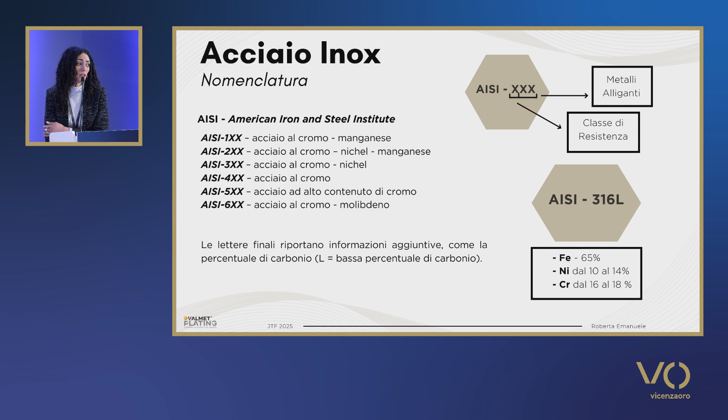AISI 316L is a specific type of stainless steel. It is a chromium nickel alloy containing 65% iron, chromium ranging between 16 and 18%, and nickel from 10 to 14%. This type of steel is also used for medical purposes.

It is not widely coated because the coating is very difficult in the case of this type of steel. The chromium oxide layer makes it resistant to corrosion, so much so that coating is very difficult.

Usually, to coat this type of steel, nickel is used. This is a material that has many additional problems. Once in touch with this material, different percentages of men and women develop allergies. This is why it was banned by the European Union in the case of the nickel release being higher than 0.5 micrograms per centimeter over the week. This is the amount which may provoke an allergic reaction.

There's a law regulating the use of this material: UNI EN 1811/2023. The threshold levels are 0.2 micrograms per square centimeter per week, with the highest level being 0.5 micrograms per square centimeter in the case of objects that are constantly in touch with the skin, i.e. necklaces and rings.

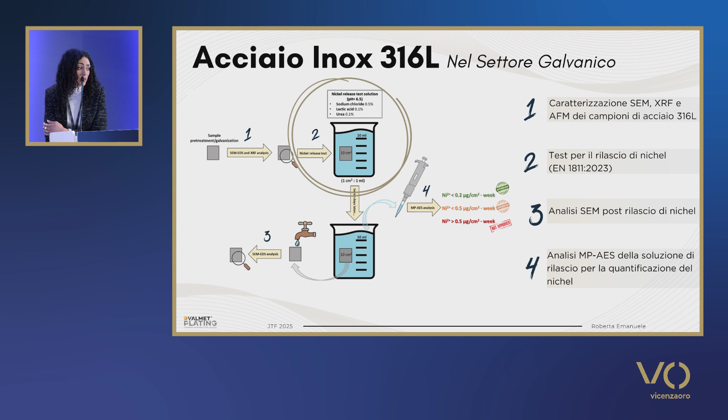So the samples were characterized by means of different techniques. After the week of testing, the samples were rinsed and were analyzed with the SEM microscope to look at the amount of nickel released, and the solutions have been analyzed with an MP-AES test. Let's have a look at the results of this release test.

Based on the legislation, samples are to be cleaned with a solution, and then they should be suspended within a container where a solution of artificial sweat is included with sodium chloride 0.5%, 0.1% urea, and 0.1% lactic acid. The pH should be 6.5 plus or minus 0.1, and the added solution should be proportional to the sample area: 1 square centimeter to 1 milliliter of the solution.

So the samples are left within the solution for a week. At the end of the week, this solution is analyzed with MPAES to understand the quantity of nickel per square centimeter released over the week. We looked at the literature.

This is a SEM test, with images taken after the test. We know that stainless steel 316L does not release nickel unless treated.

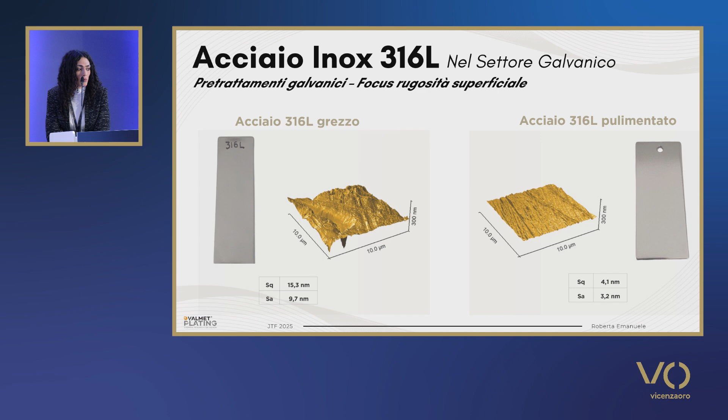If you look at the data for SQ, the two data are very different. The first set of samples was prepared using as a substrate stainless steel 316L.

We then looked at the performance of the wood nickel bath. The first set of samples have been submitted to this bath, depositing gold, a 0.3 micron layer of gold at 24 carats. These are the SEM images of the samples before the release test, and these are the images after the test.

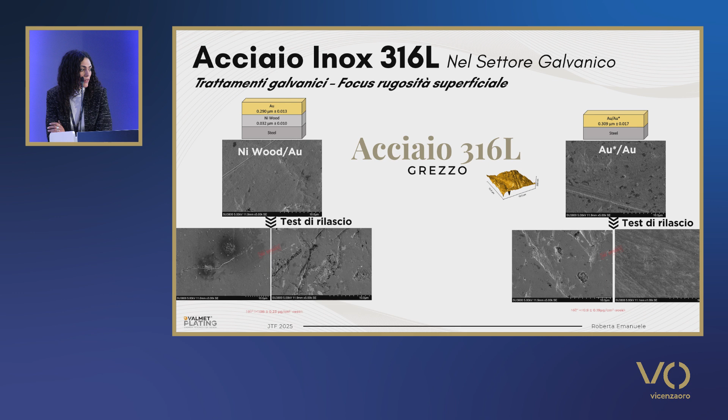As for the results, these are all averages of 3 repetitions, and as you see, the release tests are higher than allowed by the law. For the samples produced with the golden layer, the figure is halved.

You might think that the nickel is released by the substrate of wood nickel, and yet this is counterintuitive because nickel is only included in the substrate. So this means that the superficial activation and the removal of the chromium oxide that was necessary for the coating made it more liable to release nickel.

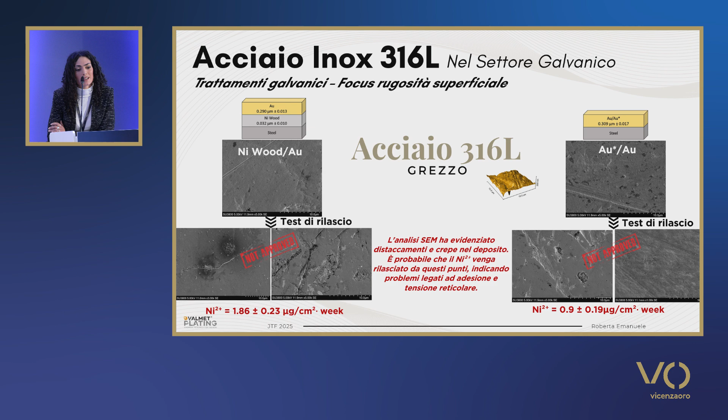In the SEM images, you see that there are many cracks on the surface, so probably nickel is released by these very cracks, where there is a problem with adhesion, and that could be due to an excessive roughness of the sample.

We then used the other type of 316L steel that was polished, and you see that the results are quite clear. In the case of the samples that were subject to coating with wood nickel, we don't comply with the rule, whereas if we use gold, the results are much better.

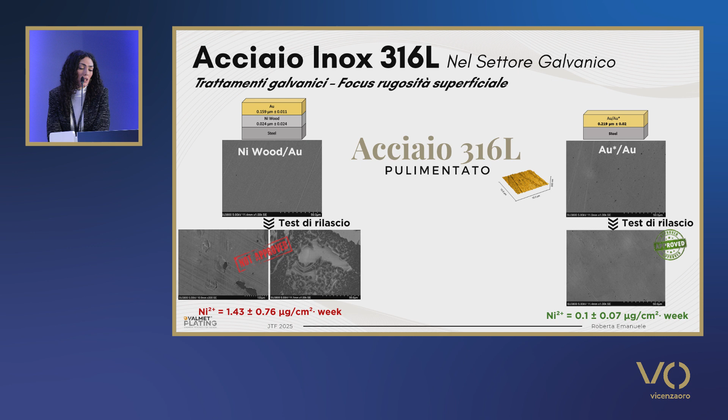We can therefore say that superficial roughness of the sample bears importantly on the final result in terms of nickel release.

We then performed additional studies using the polished stainless steel 316L, and we've resorted to galvanic layering, which is used in the case of costume jewelry, that is copper, bronze, palladium. The samples were then tested.

These are the images after the release test, and unexpectedly the results were bad for both sets of samples. There are very high results in terms of nickel release.

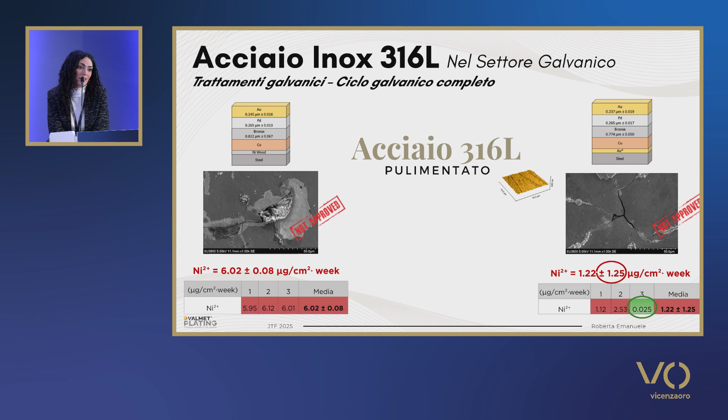The presence of this coating seems to further promote the release of nickel, probably due to the fact that we introduce additional variables in terms of the lattice tensions. We then prepared another set of samples following the same cycle as before, with the only exception being the final deposition of gold to get to the final thickness of 1 micron.

Again, the samples were checked and the release tests were extremely good. Indeed, they both comply with the existing limits, so there's no variation detected with the SEM in terms of standard deviation. The thickness of gold, of course, bears importantly on the release of nickel.

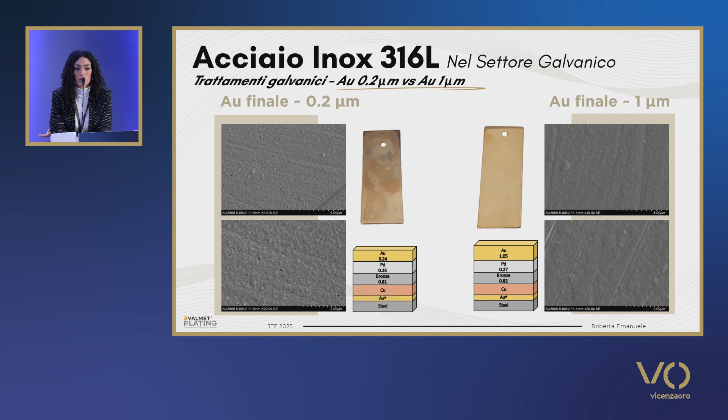But there is another factor to be considered, which is perhaps even more important: the removal of chromium oxide. To further confirm this, another set of samples had been prepared using PVD technology, physical vapor deposition. We put gold on the steel without removing oxide, and we deposit only on one side, leaving one part non-covered. We tested the samples, and all turned out to be within the limits set by the legislation.

So based on all the tests performed, we believe we have better understood how nickel release works. Stainless steel 316L doesn't lead to any release. Not even after degreasing and polishing do we get any nickel release, because there is something protecting against release.

In the case of a metal being added with previous removal of chromium, you cannot have a second passivation. Using thicker layers of gold, avoiding any porosity, we can prevent nickel from being released, because there are no gateways for it to come out.

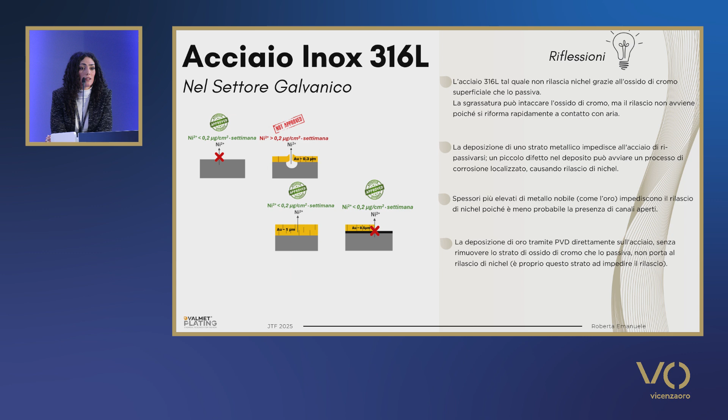Gold deposition by means of physical vapor deposition proved to play an important role. Roughness also bears importantly; indeed, rougher surfaces are much more likely to release nickel as compared to polished samples.

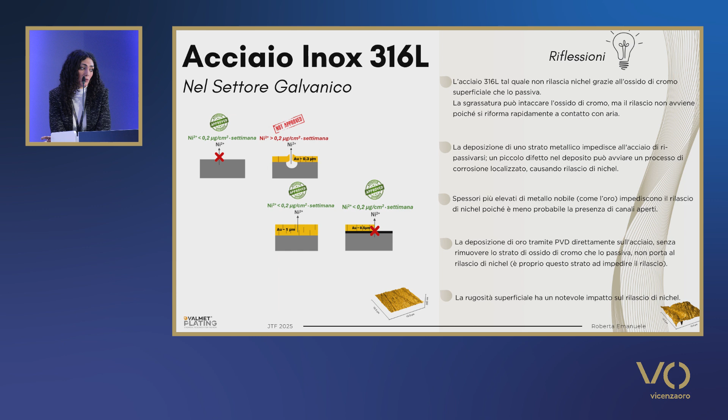With galvanic deposition, you may have different currents. In the case of more current, there's going to be a thicker layer. And in the case of high surface roughness, you're going to have a lot of potential corrosion.

To conclude, stainless steel 316L, and stainless steel as such, is an extremely valuable material. Thanks to its chemical and physical properties, it could be recycled. Galvanic coating, when nickel-free processes are used, could all the same lead to nickel release.

We have to have a polished surface with no roughness. We could use gold as a coating layer so as to reduce the release. The release is indeed caused by the removal of the chromium layer, which is necessary for the covering layer to be in closer connection with the underlying material. So basically, we succeeded in limiting nickel release, while also understanding how to improve further in the future.

Should you be interested in carrying out further research, you can find a paper, our study, on this magazine.

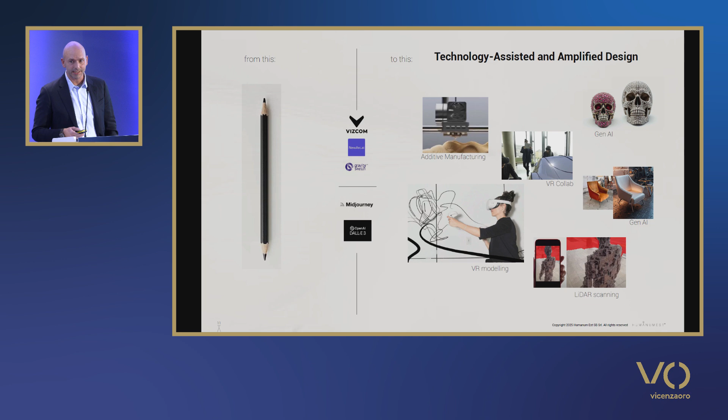Then we have 3D scanning with tools that are available to everybody, tools that are innovative because they are generally available. And this is a victory. Many students use all the tools you can see there. And of course, 3D printing, additive manufacturing, additive technologies for prototyping and small-size productions. They merge the concept of idea with the concept of materials in a very short period of time. Time and space are compressed.

Let me give you an example. This is not a copy from a real item, but an image that has been generated in 2 minutes, starting from a drawing on a napkin. That's a level of detail you can obtain in a very, very short time. It is pretty amazing. I've been dreaming of this for years.

So designers have fewer barriers, it is possible to do many more things in a shorter period of time.

So I have tried to give you an idea of the typical workflow in my industry. We try to understand the market, we try to define the brief. Then there is concept development, concept engineering, sourcing, production, communication, and customer engagement. I'm skipping one of the most important factors, which is the supply chain, because I know there will be another presentation about this. So I'm not anticipating anything.

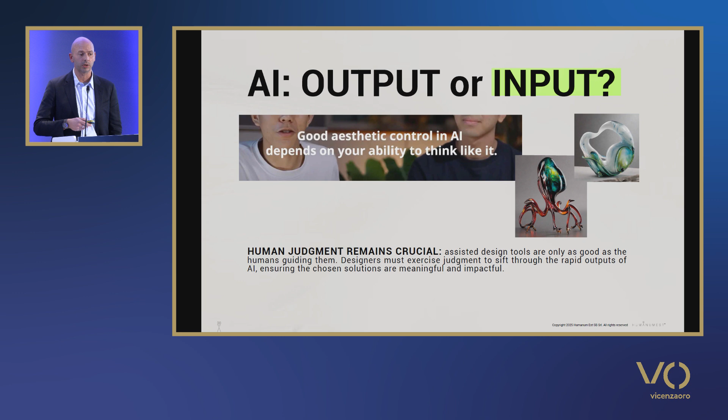I'm skipping IP implications, which of course are not neglectable. They've been investigating to make sure there is no danger of plagiarism. Is AI an output or an input? Probably it is both. If we manage to use it in these flows, we can enhance our way to design, going beyond any barrier of material or rendering or visualization.

However, there's another important part of concept exploration: the in-depth analysis to try and find the ideal solution. These ideas must be made tangible. I remember talking with a watch executive. He said, I am concerned with what the customer feels when wearing the watch with the eyes shut.

Connection with the consumer, the feeling of wearing something, metal, how the metal fits on your skin, how large a watch is, how soft it is. It is very important to be able to perceive all this in a short period of time.

Therefore, we can also add two extra phases in our workflow. The explorative one, during which prototypes are made, and prototypes are almost the definitive version because they are related to a catwalk, an event. Prototyping is useful and can take place step by step with polymeric materials first, and then we can use metal alloy.

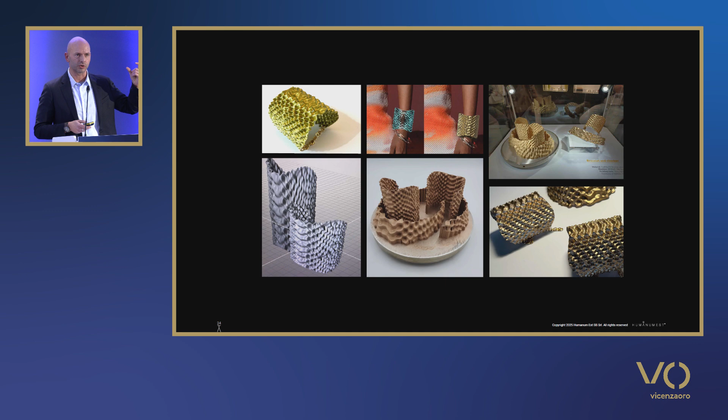This is what we've done about three years ago for a fashion show. We obtained a texture which is very complex in a very short period of time. This was done locally with a 3D printer. The result was greatly appreciated, and this gives you an idea of how fashion can relate to technology.

This connection between technology and fashion can be found in other industries. We tend to view our industry as a closed one, characterized by tradition and competence. Open innovation, however, can sometimes show different examples.

Shoes, for instance, are a good example to understand what you can do with 3D printing. Zellerfeld is a company that has focused on this, collaborating with Louis Vuitton Group, Heron Preston, and Nike. And one of their messages was: now anyone can be a sneaker designer.

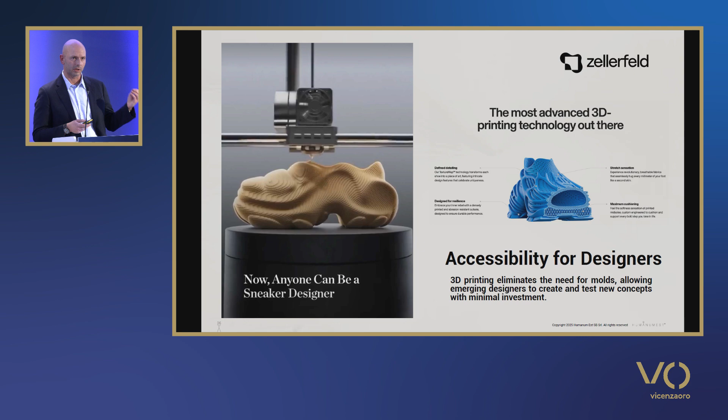Pretty vague, but able to give everybody the possibility to exercise their own creativity beyond the physical limit of their own skills. Shoes are a functional item that must compress and strain. So with one single material, it was possible to simulate different levels of resistance; using multiple materials, it would have been very complex.

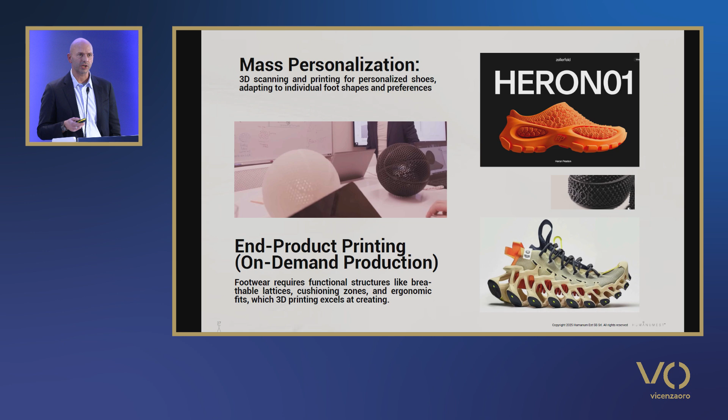And today it is possible to print with a 3D printer basketballs, parts of shoes, and fashion is moving away from glues. There are many no-glue projects.

Let's continue with shoes. In the past, we heard about virtual jewelry, the metaverses of jewelry. Certainly this is a very interesting industry. NFTs and several other technologies have proven to be very appealing to consumers.

So Nike bought RTFKT, a marketplace workshop for intangible assets. Since January, RTFKT stopped working, was closed down. So this is a clear sign of how significant experience is. This does not mean that you have to keep away from these assets; they can be valuable in terms of traceability of digital assets with the blockchain. But this is for sure a very strong signal.

So, summarizing, value creation thanks to innovation and technology, and thanks to the adoption of these tools, it is possible to understand the market better. The market must be listened to and analyzed, and this can be done today with very powerful tools that are able to process a huge quantity of data.

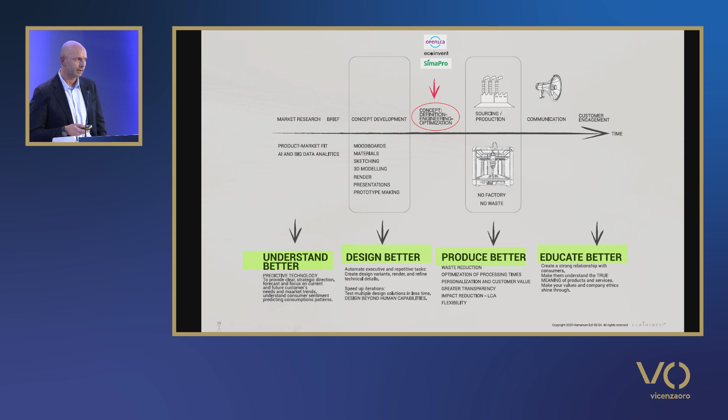And finally, educate better. We must educate the consumer in the best possible way. Once the product has been sold and sent to the customer, it is also very important to educate the customer regarding how the product was made, who made it, and which values it represents. There is a lot of talk about corporate ethics embodied in the mission and in the core values, but it is difficult to translate this into a product. Consumers must be aware of what they buy, and designers must be aware of how they design.

Let's now move to the designer. How should designers rethink their role? Well, first of all, designers must be viewed as holistic, because if the execution phase has become shorter, there is a lot of free time. How am I going to use my time? Well, it is important to have the information that supports awareness, and events like this one are very useful for a designer to understand what is needed, what should be explored, and when should technology be given a shape.

You need to be visionary. It is not necessary to produce more products. Only because my competitor is doing that, I have to do it too. No, it doesn't go that way.

It is necessary to follow and support all the actors of innovation, being a steward, a person that explains the potentials and how they can be applied in a process that is already compressed by brief timing, costs, and rhythms.

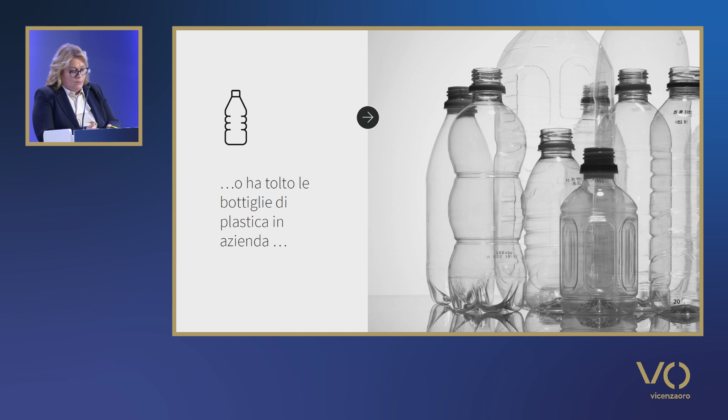A plastic bottle is included in the overall management of the company, and during the COVID pandemic we went back to glass bottles. So we are certainly going in a specific direction, but it is not only that. You have to spread the culture about the use and correct impact of sustainability, and be aware that every action can have an impact.

And then there are also organic products which are associated with sustainability, and zero-kilometer products. Technically, this is not the case, because organic has a specific meaning - compliance with a given protocol, the use or non-use of some products. But paradoxically, if I have irregular workers, I don't have respect for people. So paradoxically, I have a product which is organic in terms of certification, but which is not sustainable.

The same applies to zero-kilometer products, which certainly reduce the impact of CO2, but if I do not comply with social or governance issues, that service cannot be sustainable. And other examples: a natural product is not necessarily sustainable. A stone-made piece of paper is not a sustainable product.

So eco, bio, natural - these are words which in the new directive on green claims are defined in the greenwashing chapter. '100% natural' is one of the most used definitions, but arsenic is also 100% natural, so it's not an extra value.